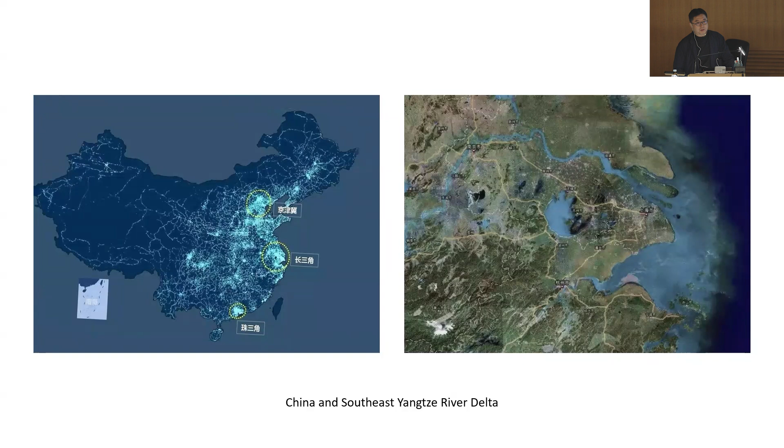And then when I came back, of course, I was born in Shanghai and I grew up in Nanjing. And then some of my relatives are from Hangzhou. So I'm actually really this kind of area. I'm the person of this area. So when I came back, I really want to sort of try to engage with the culture that I'm familiar with.

These are some wisdoms developed from the iterations of Chinese architecture and gardens, including philosophy, ontology, methodology, and experientiality. I see some of my students are laughing because they choose the same picture that I love as well. Yeah, these are from before your class, actually.

But on the other hand, what I faced in reality is quite stunning. I found that there's a big fracture, a big void between what I see from my original culture and the reality in urban or rural, or tectonic or spatial conditions. All these things drive me to start thinking, I cannot just practice like doing some good buildings within this context. I need to think about how to improve, to give a pursuit from my own point of view to engage and push architecture in certain directions.

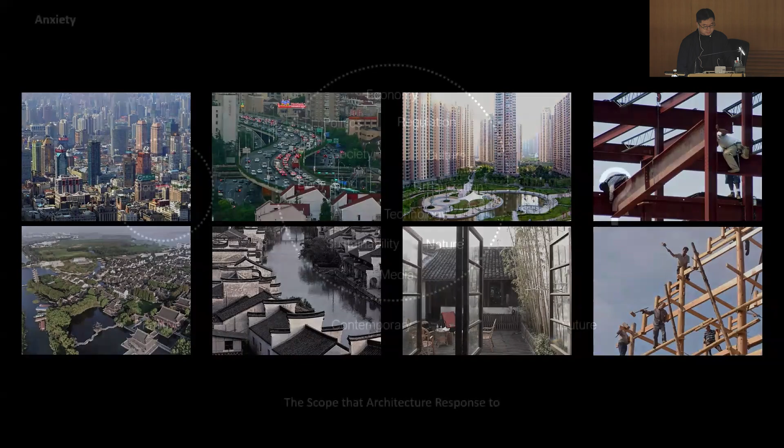I want to make my iteration more significant, more meaningful in a way. So then I think it's not only the problem of the contrast between tradition and modern. It's more of a discourse between the complexity of contemporary compared to our primitive age. And it's not only in China, this question is regarding a global context.

From this diagram, you can see in primitive age, architecture only needed to deal with very few things, like nature, including materials we are using, and our own body and mind. And then maybe a bit beyond that is the tribe, a kind of collective experience.

But then look at today - contemporary architects have to deal with all these different complexities. As practicing architects, some of you sitting here understand that we spend so much time dealing with all these headaches, which leads me to ask the question: can we go beyond it? And all these red marks are actually, I found, artificial things - things extended from human beings.

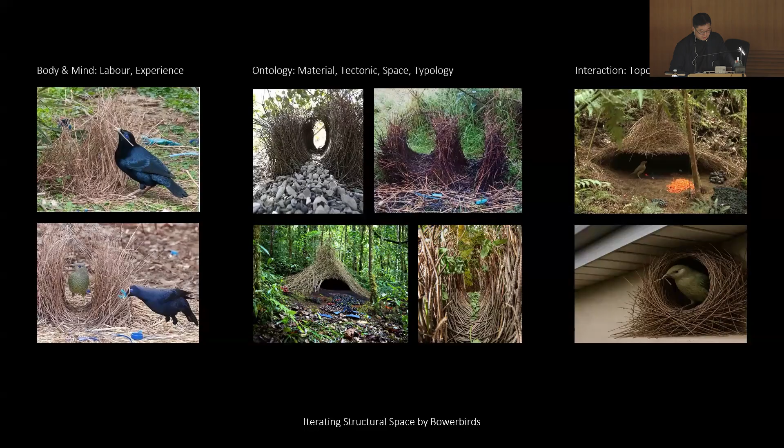So here comes my PhD concept, which is I see architecture as a human's extension, and there are three fundamental paths of architecture or architectural evolution: body, mind, ontology, and interaction. The body-mind is the foundation, ontological value is the intrinsic core, and interaction is the external force, which includes everything—technology, society, nature.

By doing this I clarified my mind. I say whenever technology develops, I won't get anxious anymore because it's just one part of the interaction that architecture has to use to push itself to change and move on. This is only an age where technology is dominating, but that doesn't mean it has to dominate everything all the way through the whole history.

This is how architecture gets evolved. So with this concept, I've developed my idea of how to iterate my practice. Instead of just doing projects every day, every year, I try to make my practice a clear thread to iterate, to seed, instead of just leaving messages.

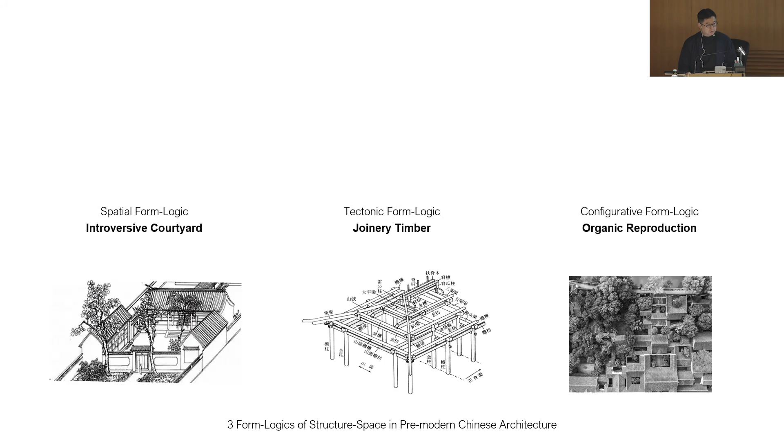These are the three form logics of structural space in pre-modern Chinese architecture: the introversive courtyard, joinery timber, and organic reproduction.

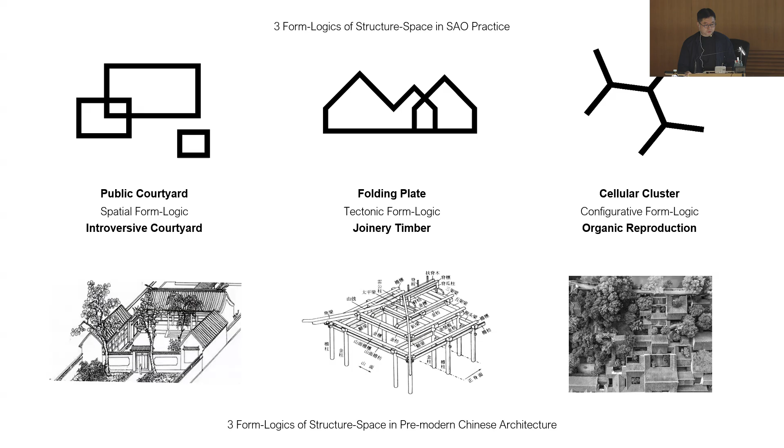What we try to develop are three new directions of iteration: public courtyard, folding plates, and cellular cluster, generated from the culture I grew up in. I can call these, for now, in the past 20 years, the three form logics of structural space in our architecture practice.

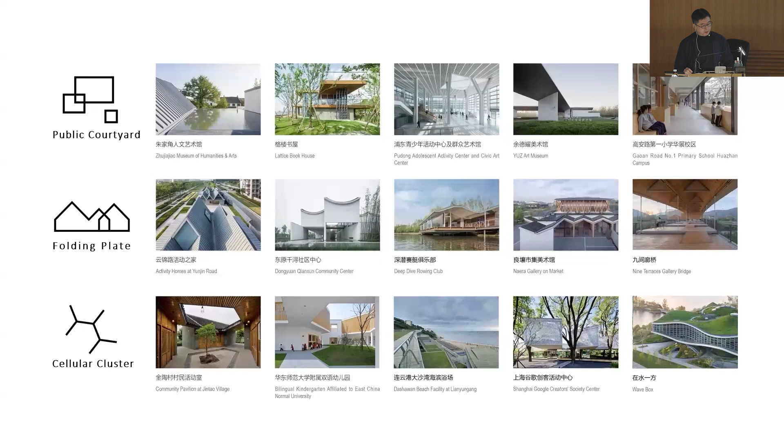These are a grid of our practice with these logics: public courtyard, folding plates, and cellular cluster. Public courtyard deals with spatial category, folding plates uses the cultural identity of the pitched roof with structural space underneath—which is our interest—and third is using the cellular cluster to try something new, pointing to new settlements and how reproductive elements can help our society grow.

Today I'll give some examples of these three threads. First, about public courtyards. There's a lot of threads we can develop from the original form logic to contemporary extension. I won't go into too much detail, but with a common space, one side is tied to nature, the other to the urban direction.

And then we developed this platform idea into an 80,000 square meter children's center and public art center, which is actually interactive platforms to encourage different students and tutors to communicate with each other through the platforms and through all these terraces after they enjoy their education or activities within different sized boxes.

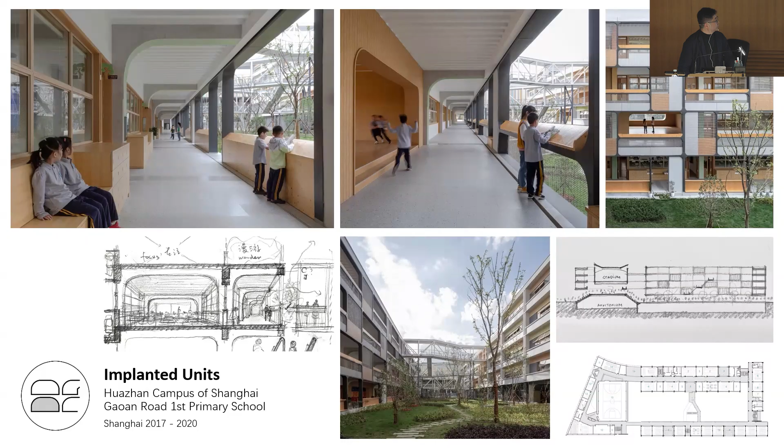And also, we start to implant courtyards into typical, very narrowed down sites for schools. For example, this is something we did in Shanghai, implanting courtyards into the corridor space, giving people the same scale of classroom size for students to engage with nature and also to communicate with each other while reading.

And then also this is a new project we did in Shenzhen, just finished several months ago. We are trying to engage the courtyard, how to open the courtyard and connect different courtyards together with the sports and the educational scenery.

This is the first detailed project I want to develop and elaborate a little more, which is an art museum in Shanghai. I give it a name called Reciprocal Common. The project is actually at the periphery of a developed ancient town, but newly developed, with a green belt around it, and our building is actually...

Can I give this? So there's no pointer, right? Oh, there's a pointer here. Okay, the top one, okay.

This is the location of the museum. We're not doing anything within the town, but it's in the green belt. So we try to keep a distance, keep the building with a distance from the commercial fabric. Whereas this whole town was famous for rice field and rice market, so we are giving agricultural field as part of the outdoor space of the museum.

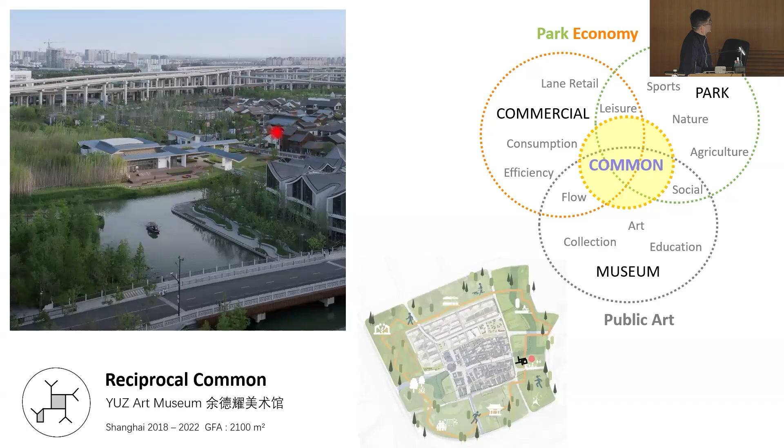So the whole museum is not an enclosed volume that only speaks its own, but also we use the courtyard idea with corridors to expand the experience of the courtyard and link them with the surroundings, with this reciprocal structure. So the museum only occupies one corner. The other three corners are rice field, plaza, and riverfront, and then we have a reciprocal structure of corridor to link all these things together.

And then we try to open up the art activity and expand it to the common space, even tied with the commercial activity. And the whole idea about the reciprocal structure is to divide the normal gable wall in half, so they can freely support the reversed roofing structure, and the indoor space does the same thing. This is the plan and the section.

So you will feel when we do pitched roof, we never do a big scale like, for example, like Wang Shu did, because what he usually does is a grand scale. But we always care about the scale underneath one roof. So this is usually a very intimate size of a traditional house, for example, 6 meters.

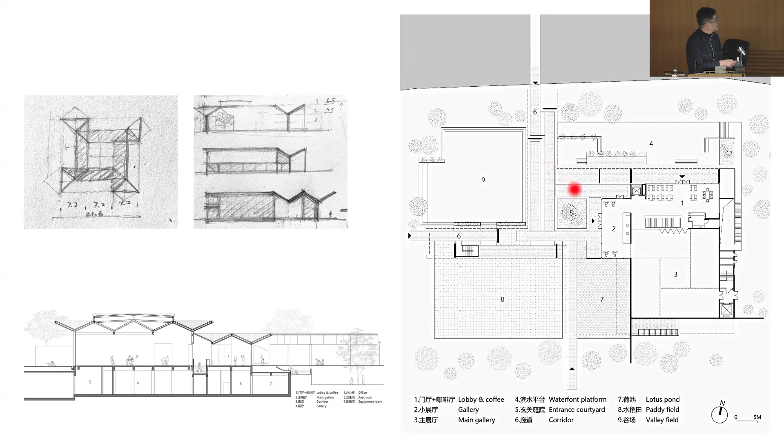So here, this is 7.2 meters for one bay. So altogether, we can have a 20, 21 meter by 21 meter, over 400 square meter gallery space without columns, just a reciprocal beam from four sides. And then we also use the structure to house all the other kind of entry space, cafeteria, small gallery, and the gallery corridor as well.

So here comes the courtyard in the modeling, and this is not a fixed set of species and activity. We hope the structure can serve the community better, with art activities and commercial activities as well. This is also a way that the museum loves a lot, because it can house a lot of activities outside.

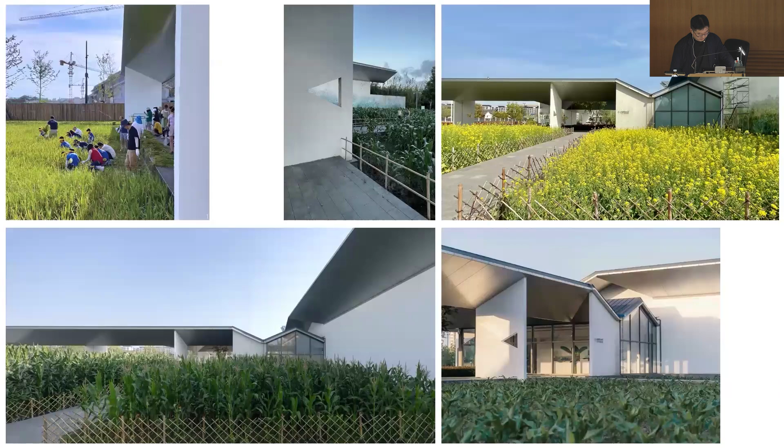And then the courtyard space becomes a test zone area for different species in different seasons, including many species here, including corns and other rice fields, and also you cai - how to say that, the yellow flower thing.

Now, when you enter the museum, you have to go through this vestibule area in the front, and then you enter with all these kind of... So no matter where you are moving, either outdoor or indoor, you are underneath this pitched roof, abstracted, and then pitched, which hopefully can arouse the connection, cultural connection with the tradition.

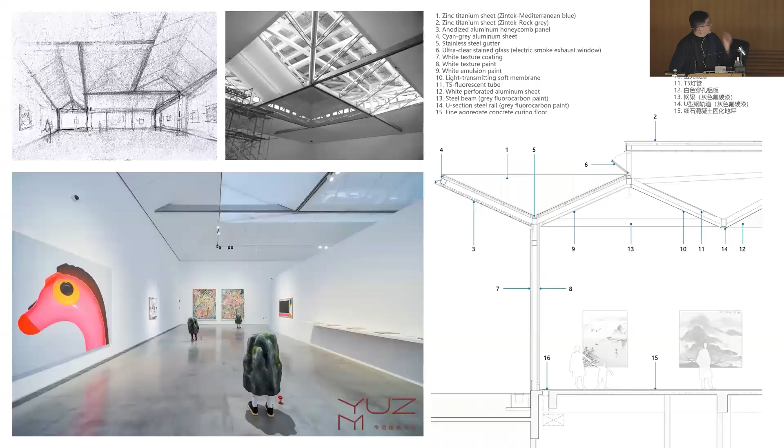And then this is the indoor of the biggest gallery space, which actually uses the courtyard idea in the center to introduce natural light on top of this reciprocal structure. This is the indoor, the first exhibition curated by Wu Hong, a great curator. And then he actually used the sidewall, which corresponds to my reciprocal structure.

These are some collections from the Yuz Museum. Later on, we invited the museum and different curators, and they started to play with the geometry, which for me is kind of interesting.

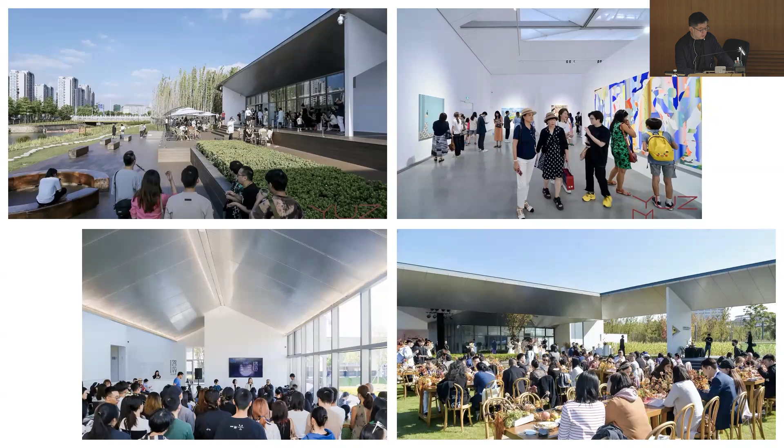They sometimes rotate it and create different feelings and experiences inside. These are some very vivid activity scenarios in and out, like the riverfront, the courtyard, a lunch setting, a lecture setting, and also the opening setting.

This is the second courtyard project, the Dongyuan Qianxun Community Center in Suzhou, another important city in Jiangnan culture. It's in the north of Huqiu Lake.

It's actually part of a big real estate development, and these are all very rigid townhouses. We are doing this community center not only to serve these houses, but also to serve the other surrounding communities. This location shares a demand because this whole area is a little vacant.

At that moment, it wasn't the ancient, traditional, very dense fabric—here is more of an open area. So we do need some sense of enclosure. On the other hand, I also don't want the building to be too enclosed; it also needs a sense of welcoming for the community to join.

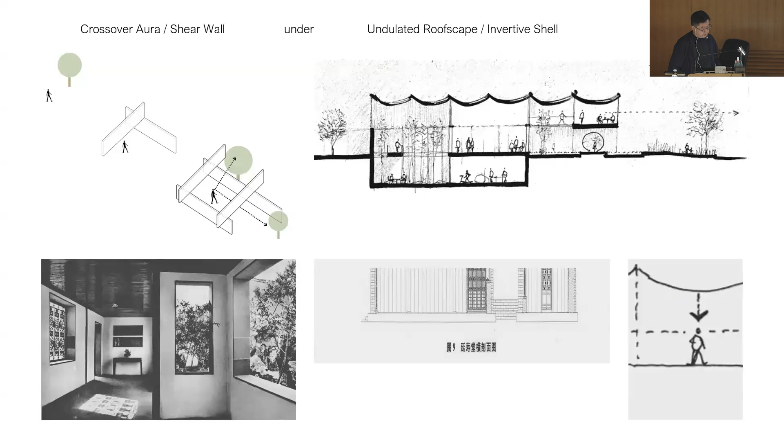With this underlying diagram, you can see how people are actually giving pressure underneath the reversed vault roof. So these are how the structure works, with the indoor and outdoor space.

This whole system is two stories tall. We try to bring the courtyard idea into the second story and merge it together with the ground floor experience, giving a new chance for the traditional courtyard idea to grow in three dimensions.

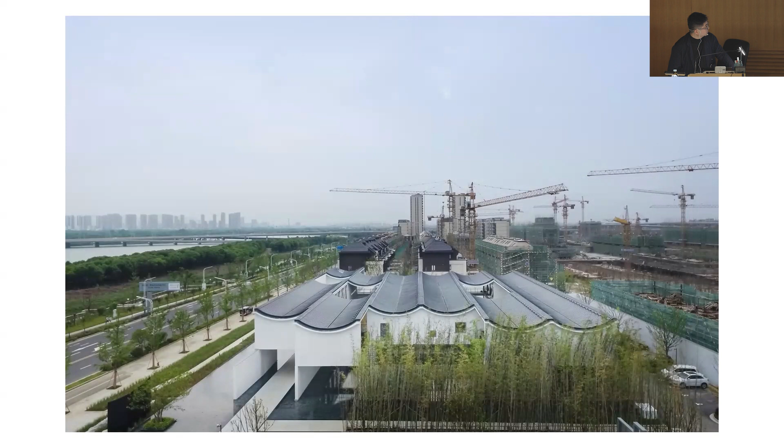You can also see the courtyards inside the building, and how these walls go out and in, containing all these different layers of space inside.

Where there's a sunken garden, it goes even deeper, becoming three stories tall, with bamboo growing from the basement.

The third project is a new project we finished last year, YK Pao School in Shanghai. It's a new building for the school, called the Anna Pao Sohmen Center. Anna Pao Sohmen is the founder of the school, which is now a pretty prestigious international school in Shanghai, and they're opening a new school in Hong Kong.

My client Herbert is here. Yeah, thank you for joining us.

This project is situated near a train subway station, not far from Hongqiao Airport, and all the surroundings are kind of low rise—in Shanghai, a lot of villas, and kind of national resorts around it. But the site itself is pretty tight.

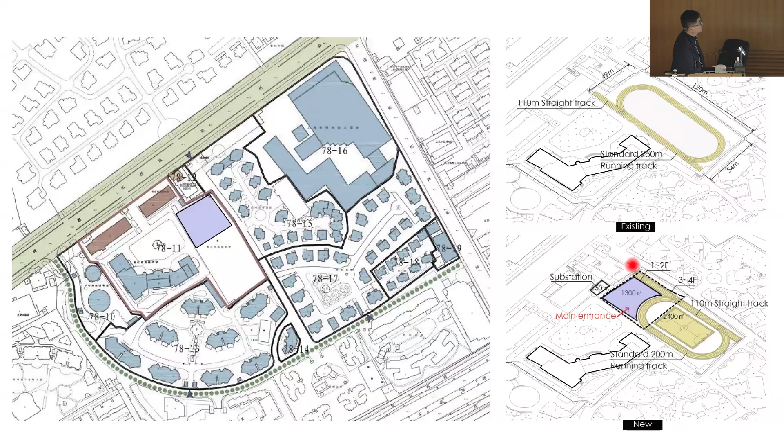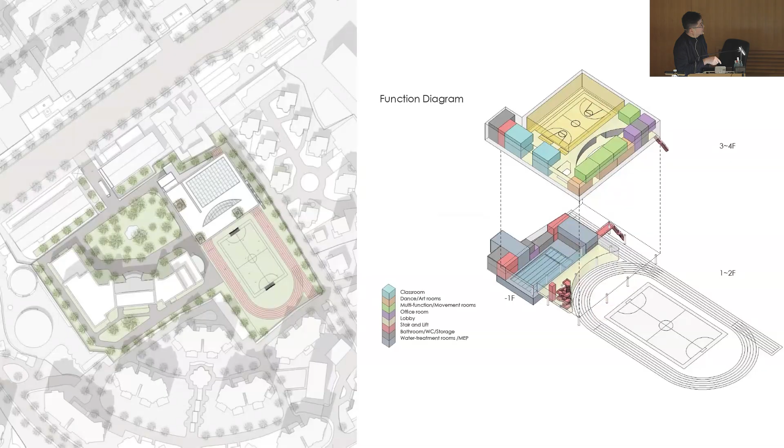This project actually starts from a very rigid limitation. We have to do everything precise, otherwise we cannot afford to have all these things together. So on the ground floor, or bottom, we have a swimming pool, and above that we have to extend out, meaning the front part of the building needs to be cantilevered out or supported from the field.

This is the ground floor. You can see how we introduce the runway into the building, underneath it, with the entry, a lobby, and a swimming pool behind. We use two truss structures, two V-shape columns to support the truss above, so as to open the two corners of the building to allow the track to run through. You can see how deep this building needs to set back on the ground floor.

From this we start to develop the idea of interface. You can see four layers of interface, and we create transparency between the faces so that people don't feel trapped in one space, but instead are welcome to see through and join the other activities around.

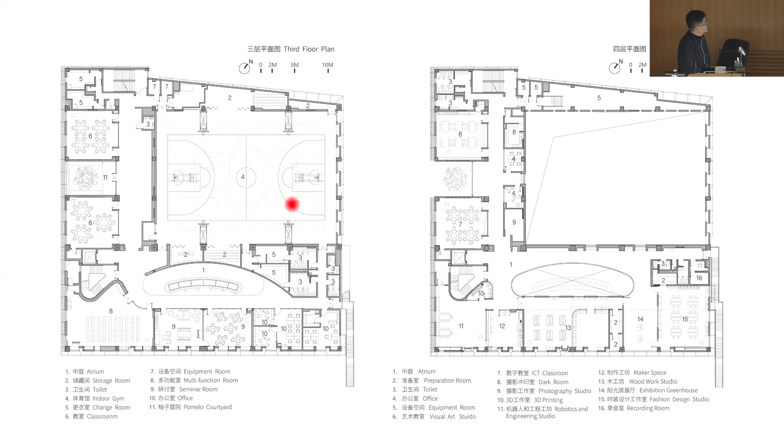This happens on the third and fourth floor, where the stadium sits two stories tall, and the other classrooms surround it with openings and small courtyard spaces, all visible through two axes with transparency, visually and experientially.

This is a section showing how we deal with the interfaces, and also the vertical transparency. There's also another basketball field on top of the stadium.

So we do these terraces, and then tilt the slab up to allow natural light to come in without using electricity in the daytime. The stadium can run on its own.

These are the sections of the building. It's a very complex building with only a little less than 8,000 square meters, but houses really complicated programs within. In Shanghai there's a saying, 螺丝壳里做道场ー I don't know how to translate it exactly, but it means doing a lot of things within very limited space.

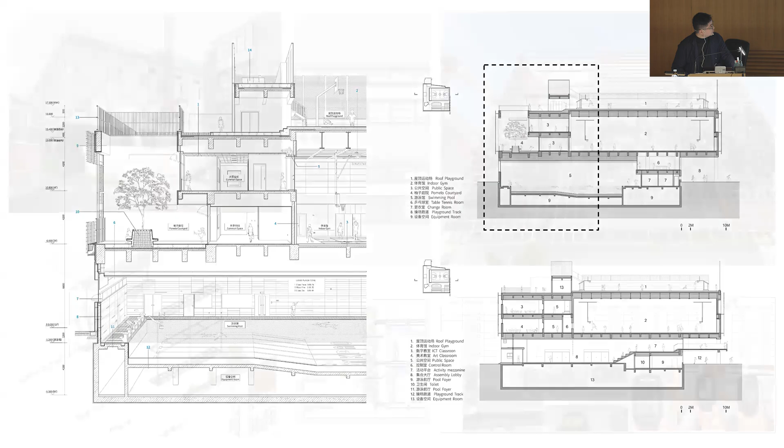Thanks to our client for supporting everything, particularly the mock-up. The building was wrapped by a trellis, a grid around the building, and also with greenery. I hope this greenery can grow, so the whole elevation changes every year, gradually, starting to grow from the second floor. So we need to provide planters.

There was also a big debate on what kind of material needed to be used here. First we were trying a composite bamboo structure, but the contractor complained it would be easily damaged and not climatically friendly.

The client helped us, we talked deeply, and decided to do a mock-up on site at one-to-one scale, comparing bamboo and aluminum together. We did scientific records of the temperatures on top of the surface during the hottest time in summer.

Interestingly, we found there's no significant difference. The temperature on the surface of the aluminum was actually even a little lower than on the bamboo. After one year—thanks also to the pandemic, which delayed the whole project—this test went on for a full year.

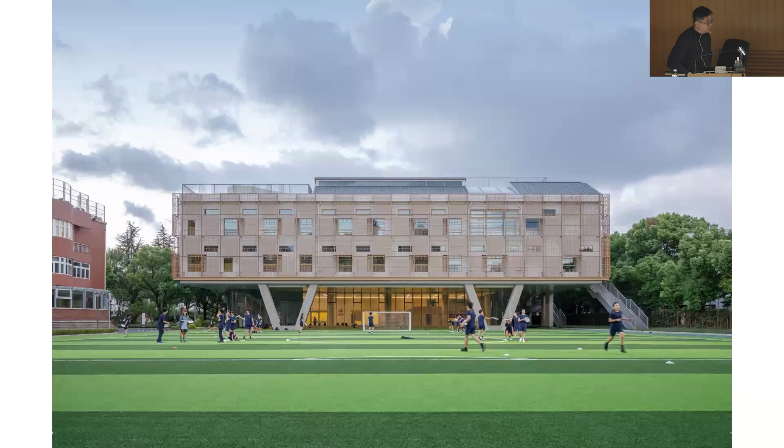And then this is where it's finished. The front. So you can see these V-shaped concrete columns perfectly shape the door of the gate of the soccer fields in the middle. And then we also have netting between the two columns to keep the ball away from the glass. This is the west wall.

And then this opening, behind it's the swimming pool. This is the corner. So with this opening, this truss on top not only allows the track to run through, but also opens a corner between the old building and the new building.

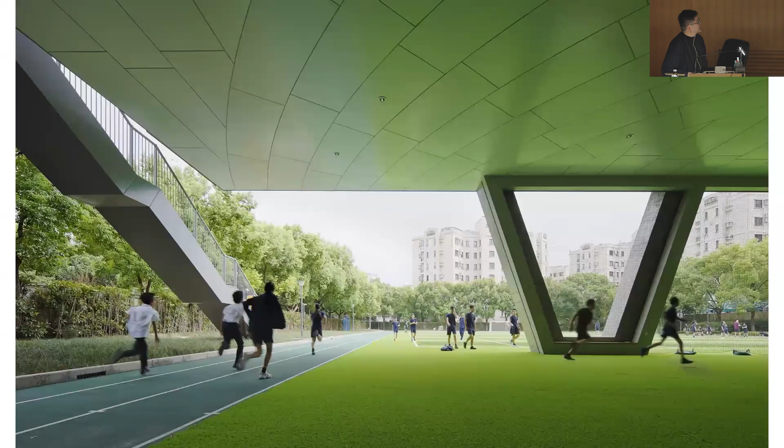And this is the covered area, which reflects the color of the grass. Actually fake grass, this is not real grass. But I like the green sort of bonding into the depths of the space. And this is how the 100-meter long track runs underneath the building.

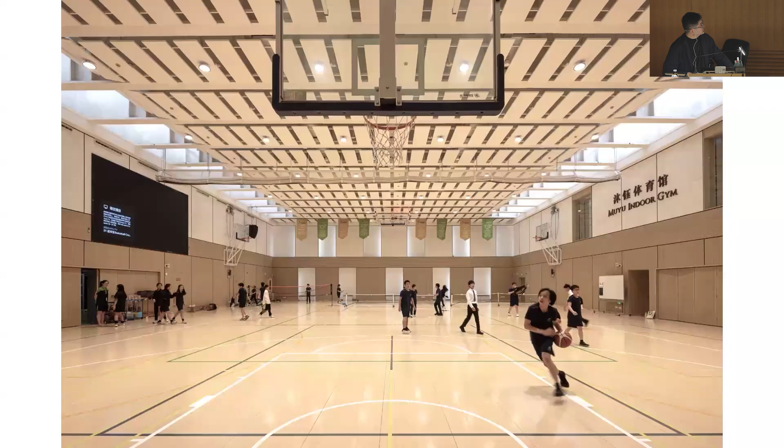The staircase and then the lobby inside on the third floor. And this curve is exactly going down. You can see through, you can see the running track underneath, and this can get some sunlight from the top, which is also a curve. So this curve actually totally reflects the running track underneath the stadium. And all these lights on two sides are also natural lights.

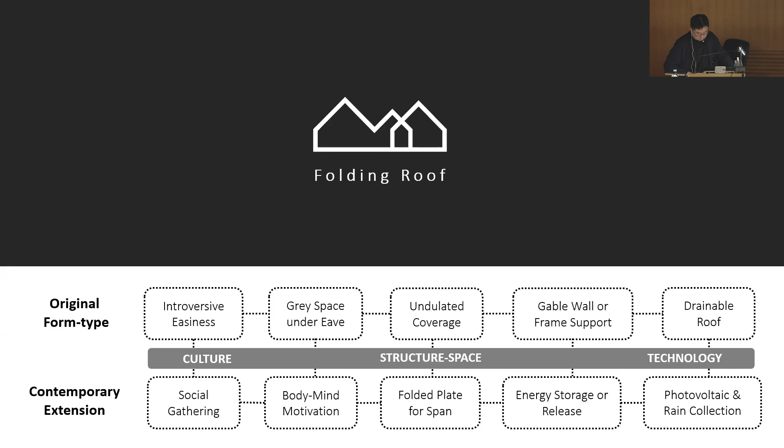First project I want to share is a rowing club in Century Park in Shanghai. Rowing actually was developed in the United Kingdom, but this park is in Shanghai, a grand central park in Shanghai, one of the biggest, and it's riverside. So we tried to combine these two images together: one is a very traditional prototype called 水榭, a building type that is beside the river or even planted into the water, combined with the rowing sports.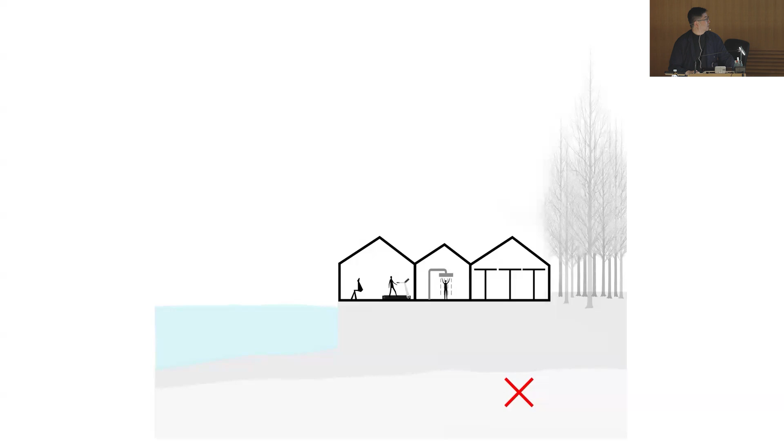So what we are trying to do is embed the activity room into the river, and then leave as much as possible of the forest, and make a dispersed boathouse, so each boathouse will be very thin, slicing into the forest.

And this is the plan that you can see on the right side. So there are three boathouses slicing into the forest, and this is where the river bank was, so we used that for lockers and showers. And then this is the activity room, including exercise and rowing machines, and then they can go down to the deck to practice in the river.

So here you can see my sketch using the symbology of the boat, the rowing activity, as a symbol of how the structural space is developed. Because we have two hands and two oars, the structure is also like two columns. Between the columns is only 1.2 meters, which is the width of the door, and this is the only structure that supports the upper eave and also the bottom deck. So there's no column here and here, and these folded plates start to play with the landscape in either direction.

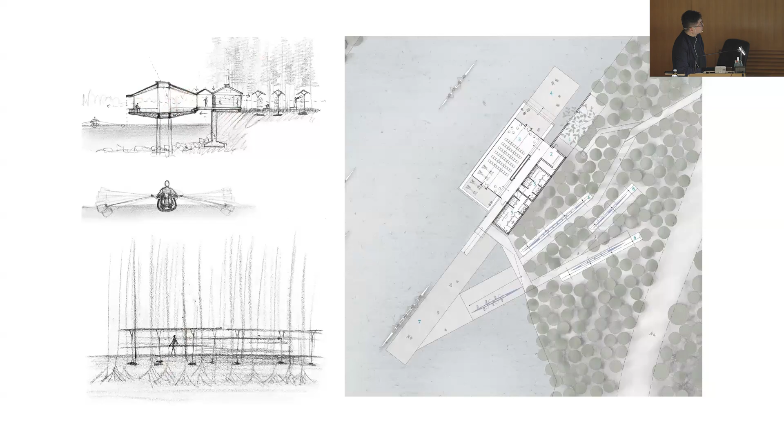And this is the section model. So I hope my students understand what I'm expecting from you for the final review. Structural space is engineering plus atmosphere or cultural identity. So they are not separated, they are together.

And this was the model of the building. Here you can see the main building, two pairs of H-shaped columns to support these two roofs and the deck, and the pipes are embedded in the river bank. Here you can also see another detail about how I use two L-shaped corner column angles to form this small column and bifurcate them on top to support the pitched roof for the boathouse. This is actually the thinnest building we have ever done, it's only 1.6 meters wide.

And then at the bottom, the trellis is supported by individual concrete foundations to allow earth, frogs, and all these species to go underneath, in and out, without disturbing their life.

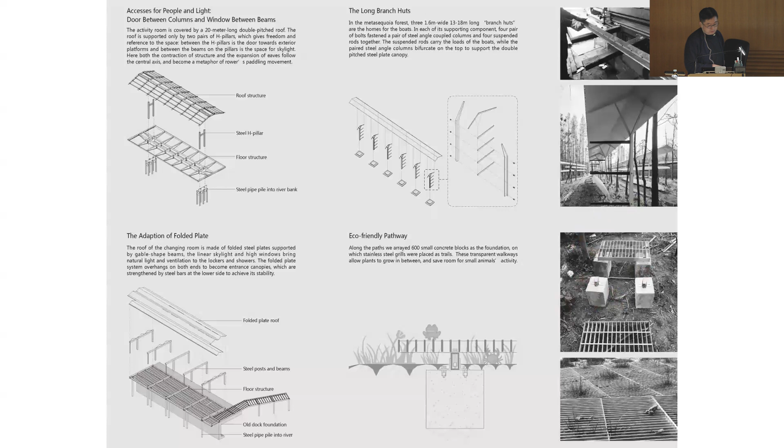So this is how the building is situated in the landscape, and this is how the decks separate them into two paths in the front. And this is how the boathouse is inserted, assembled from the factory.

The gate. We actually use the wall extending out to separate the experience inside, in the forest, and then in the river. We want to have them really separated, not really giving transparency. We want to give a surprising experience for the users.

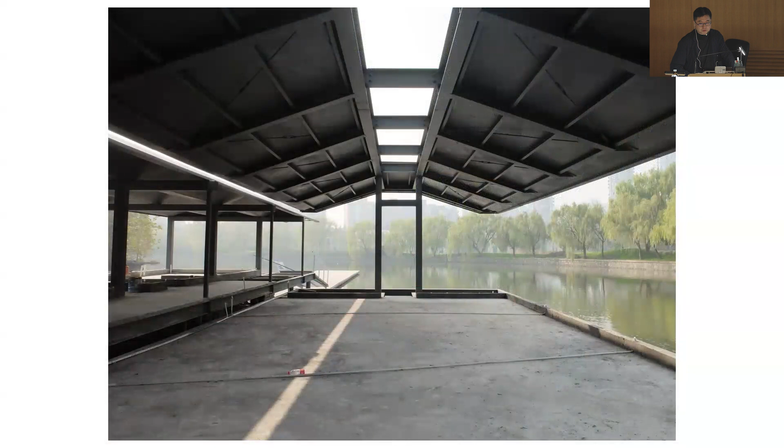And this is the structural space under construction - it's always better than when it's finished. Until now I've never figured out a way to save this feeling, so I'm still trying to find out, because only by seeing this can you clearly see how the structure is supported, without misunderstanding the logic of the structure.

And this is when it's finished. The air conditioning goes with this machine, and then with the ducts connecting to the bank. So the whole facade can be opened by these folded windows. And this is the deck behind.

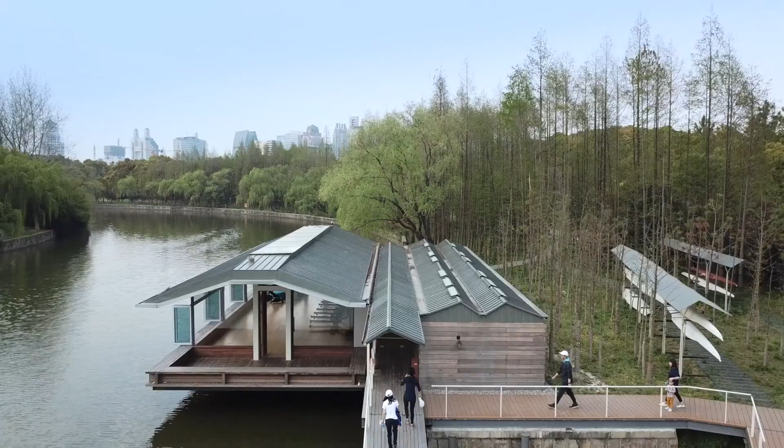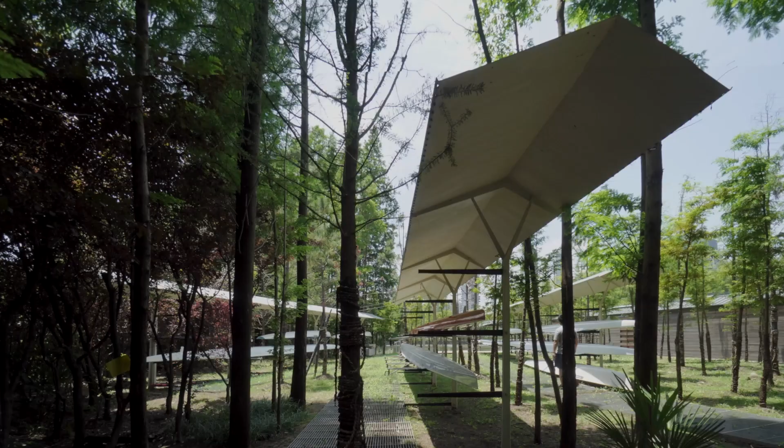Okay, there's also a small video to save time.

This is the second project, the folding roof activity homes at Yunjin Road West Bund. People who went to Shanghai recently may know West Bund is one of the hottest spots in Shanghai, with many arts and architecture, and also a new industry of media, with Alibaba and other companies based there.

The hottest spots are maybe along the Huangpu River bank, but the project we did is actually a little bit inland, at what was actually one of the earliest airports in Asia, called Longhua Airport. This was the runway of the airport, back in 2010 before it was renovated. After that, it was renovated into a big boulevard together with a green park, a runway - called Runway Park. So we designed three buildings in the park.

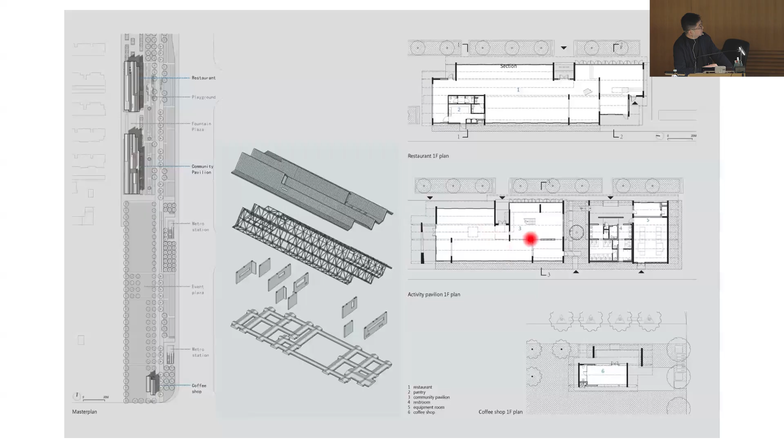Without columns, these folded plates can span like 15 to 19 meters. That can create a different kind of hint of how to use the space. But all these spaces are actually open to each other, so we are welcoming different layouts for the users, and also give them a hint to encourage them to communicate with each other. This is how the community space is working in the future, I think.

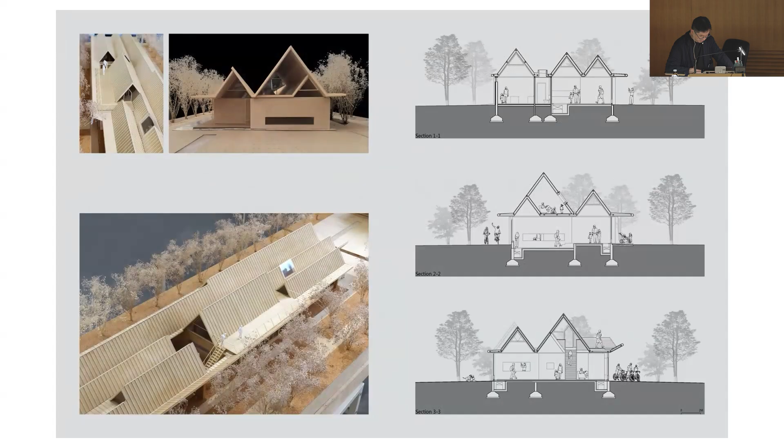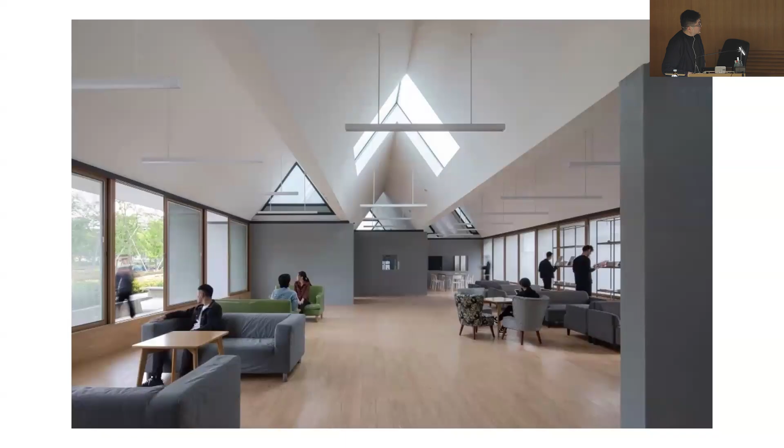We developed this bridge, I call it Nine Terraces Bridge. We used the pitched roof as a span carrier in the Nanjing Horticulture Expo. We designed this hotel village, the north part of it. Actually, the southern part is done by Dong Gong, who gave a lecture two weeks ago, but it seems he didn't publish this building. Maybe not precise enough for him.

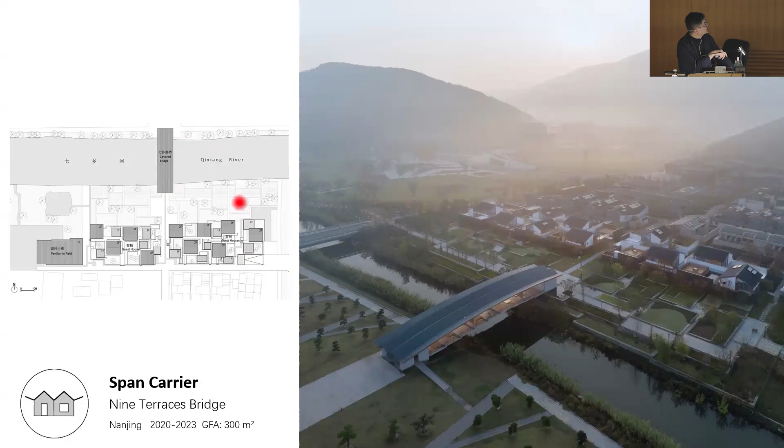We did the pavilion and some courtyard houses, and then this bridge going north to the parking space. There's a requirement for river clearance for the boats, and on one side of the river is the parking lot, and visitors need to go across the bridge to their hotels. We thought they drive for so long, we don't want them to climb too high across the river, so we wanted to keep the thickness of the bridge platform as small as possible.

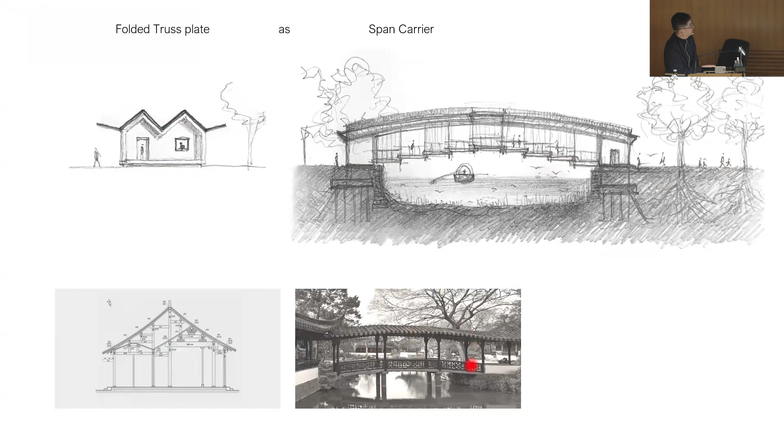Of course we don't like the idea of doing a big beam, because when you do a beam it has height, and we also don't want to do a truss because the truss is maybe too industrial to us. So we wanted to give the two bridge heads a sense of going home, like a pitched roof going home, so we cut it into half, like two half-houses. Here are some references from the Suzhou Gardens with this kind of lightness of bridge on top of the river.

So the final idea is to hide the truss, folding plate truss, inside the roof system, and use this as the main structure, hanging these platforms with three rods. People need to go up and down the bridge because there's only a 200 to 300 millimeter difference, so we can have slopes and small steps to link all the platforms together.

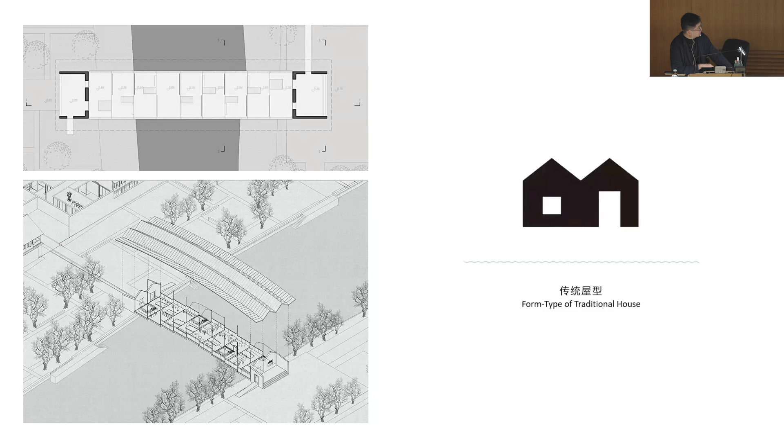By doing this, we can give a kind of social community usage to the bridge, meaning it can be divided into 9 different spaces. People can use them for maybe secondhand markets, whatever activities, retail, or resting areas underneath on the platform. This is a small animation about how the structure space works.

Oh, I hate the music. Sorry. My system.

This is the best picture I like, which shows the lightness of the platform that is hung from the roof. So by doing this, I convince myself it's not always a problem of traditional versus contemporary. We should go beyond that. But it's true that the form from the previous age actually ties us back with a cultural identity that I believe is already embedded in our blood, no matter which country or area you are from. So it is actually very meaningful to explore new possibilities of this form itself, to see how it can serve our future.

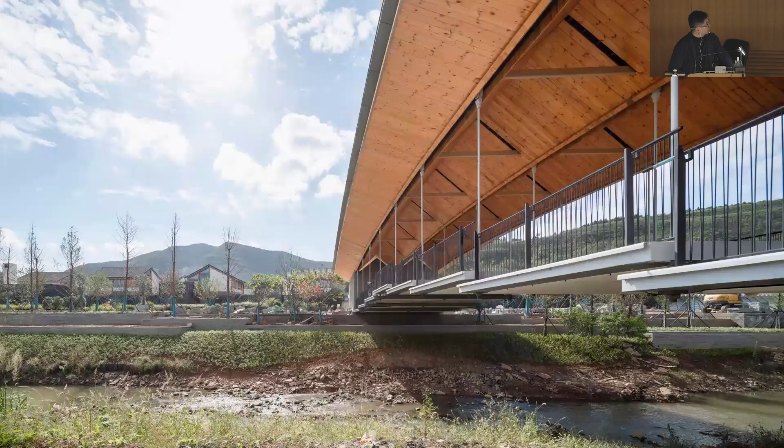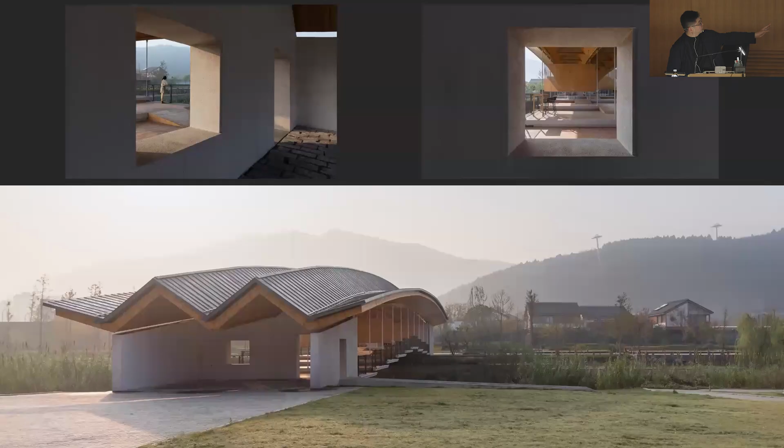This is how the bridge spans to the other side of the river. Each bridgehead is kept very intimate, like a small house with just one door plus one window opening. On the bridge, the terraces are divided, roughly defined by a bamboo screen, and people can sit on both sides to look outside.

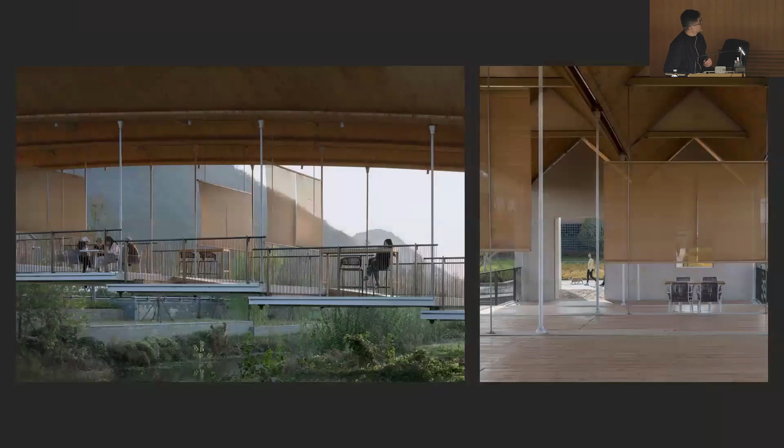Last category, I only have 2 projects. I call it Cellular Cluster, which is generated from biological form logic, and I think there could be a lot of architecture extension through that in terms of unit capability and organic reproduction.

We developed it from this single collector as one piece of units, and then to a cluster of units as a kindergarten.

And then to this Dashawan Beach facility, we utilize the periphery of the hexagon shape to make a Y-shape structure that spans different levels.

So here comes another experiment of the Y shape derived from the hexagon geometry, which is the Google Developers Group Center in Shanghai. On the side, there are 6 camphor trees left over, and our building is just underneath it.

The idea is that because this whole green belt is very noisy, with pedestrians walking through to work every day, if we want to have some kind of activity space, we'd better lift it up. So we came up with a cantilever idea, and lifted the whole volume up.

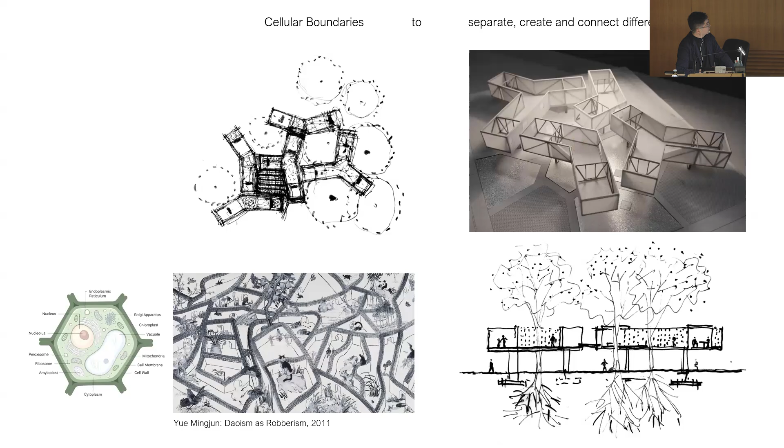So all the pieces are only 4.5 meters wide, and they organize these spaces or gardens in the sky.

We even created interesting pedestrian roads—everything has to go through the middle. When we have a toilet or restroom, it has to be divided into 4 small rooms.

This is how the structure is assembled on site. Each tank is produced in the factory and assembled together on site.

In order to prevent damage to the roots of the tree, since we're playing with the tree, we lifted up the foundation to make it flat and bigger, avoiding the need for it to go deeper. But simultaneously, this would block the rain and nutrition of the water reaching the roots. So in the end, we made the foundation translucent, adding a lot of pipes to allow water and rain to go down.

One of my colleagues, who graduated from Hong Kong U, told me he had another opinion after talking with a landscape professor here—that there could be another solution where this goes smaller but deeper, to protect the roots in a better way. But anyway, this was our solution at the time.

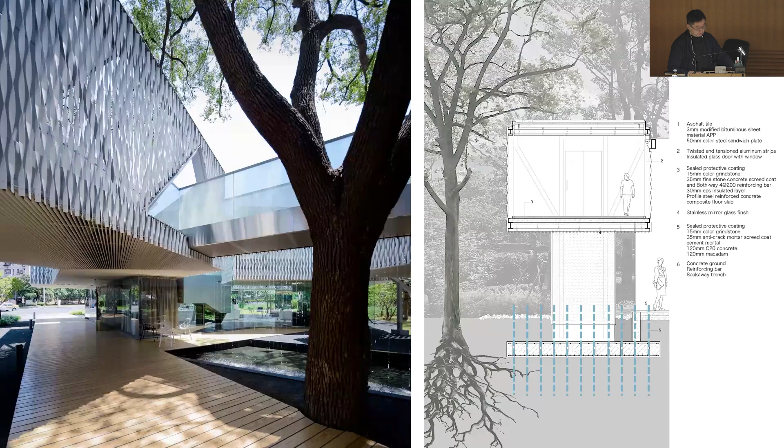All the floors are kept pretty low. Every floor is only 0.9 meters to avoid intervention with the tree trunks.

You can see this combination of structure actually finally disappears, reflected through these reflective stainless steel surfaces. But on top, you can see the truss structure behind the aluminum panel, twisted and tensioned, to give it a symbol—something we can learn from the tree itself.

And then this facade is permeable by wind, rain, and light. It's open on the ground floor, and quiet on the second floor with reflecting pools. All the openings, just like a Suzhou Garden, have to follow the logic of the structure of the truss, so they have to be triangular.

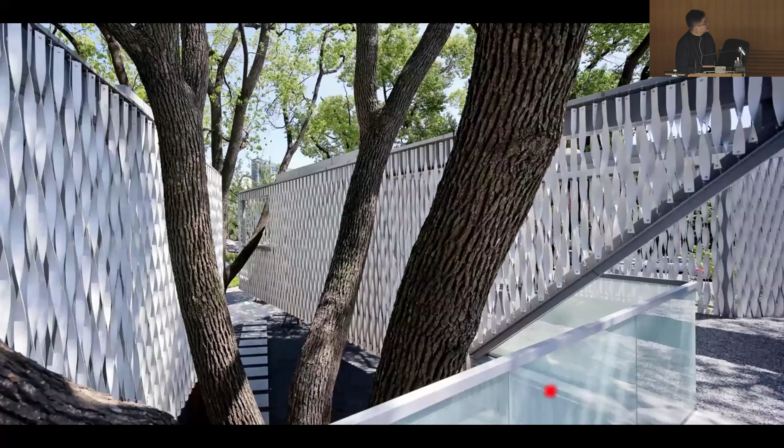We allow the trees to go through the building into it, so they sort of fight or live together with the structure.

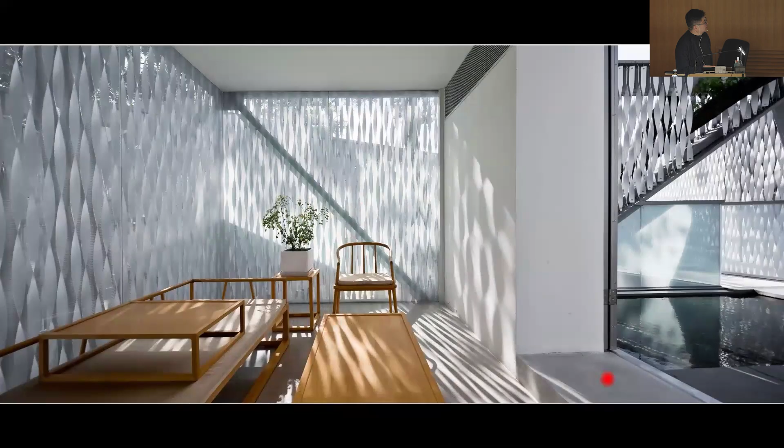This is the indoor space. In order to utilize the height, we even use steps—so in every room, you need to step down one step into the room.

Okay, the last project is a landmark, I would say. Very different from other projects we did before, but I still keep it within my kind of cell idea, cell cluster idea.

This is a project called Wave Cube, and it's run by a company doing experiential activity here in the building for Three Body Problem. I don't know if you know this science fiction novel, but globally it's pretty famous.

It's in Fengxian in China, in the Shanghai area, besides this artificial lake, and they want to do a kind of landmark around the lake. The biggest architect they invited was Sou Fujimoto, who did a museum here, but for some reason they were not quite satisfied, so six years ago they asked us to do a competition.

We got the project to do what they called in the beginning a science museum on the site. So the Three Body Problem concept hadn't jumped in yet.

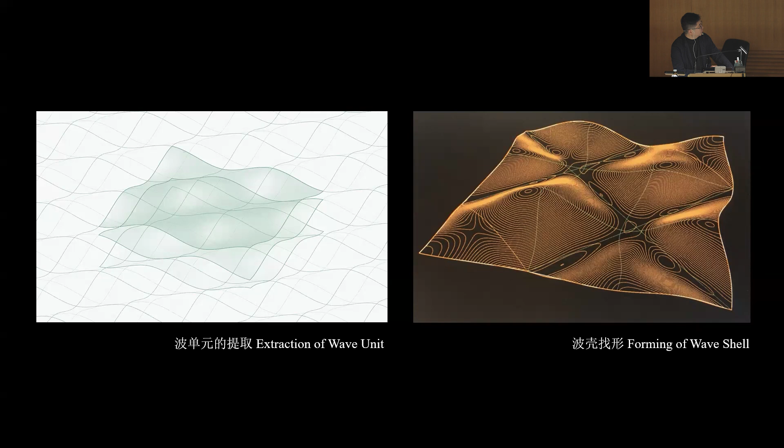But we have our own power. These are the extraction of the wave units from four layers of wave, and then the forming of how we form the wave shell.

The whole structure can be divided into, think of them like three waves. One is these hills on the ground, and they support the bottom, the lower layer of shell, and then the upper layer of shell.

And the force of the structure is not direct—it's quite challenging. If you look at this model, you can see from the top, the force goes in two directions into this X-shaped shear wall. Then from these shear walls, the force cannot go straight down; it has to be distributed again into these two directions, and then to the hill. The hill, of course, has a mushroom column underneath, but you can see this indirect force.

The structural engineer Zhang Jun and I discussed a lot about the structure. We found that although it's not optimal in terms of direct force direction, it's good for earthquakes, for seismic resistance, because the shell provides a lot of diagonals.

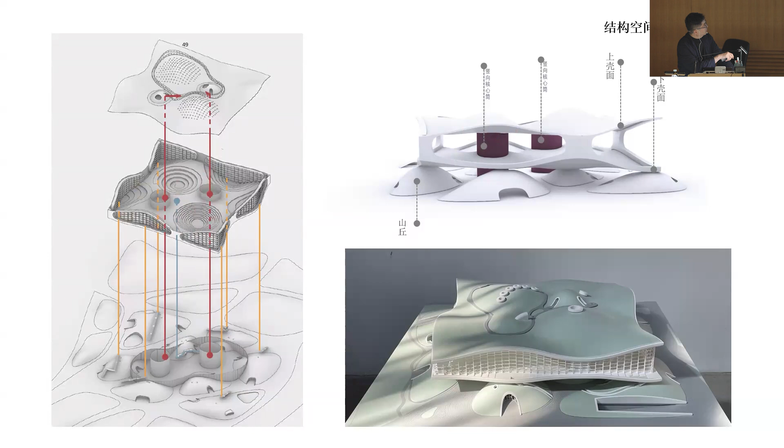So in the interior, we wanted to introduce not a flat floor at all—it's actually undulated up and down with all these different venues. So you can say it's actually very logical in a way.

This is the structure analysis, and Zhang Jun did a fantastic job. We discussed and tried to find a form together. In the end, it's something between an arch and folded plates.

So here you can see the diagram. The red one is compression, and the blue one is tension. For the tension, we had to do a lot of pre-stressed steel bars in the tubes—pre-stressed tendon ducts in the slab.

This diagram shows the cantilever. The whole size of the square is 80 meters by 80 meters, so the cantilever is 27 meters—also a pretty big cantilever.

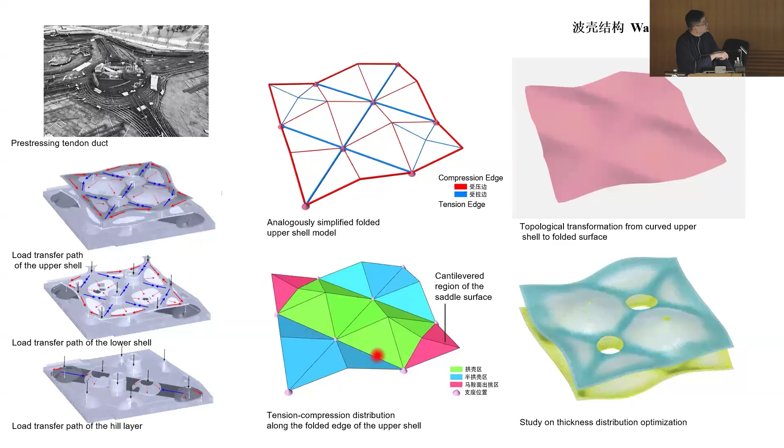For construction, we also developed this idea together with the contractor. In the beginning we wanted to do a 3D printed formwork—using something like a 1.5 meter square to support a customized 3D printed formwork—but that was rejected by the contractor because it was too costly. They wanted to go with an ordinary, conventional way of doing wood formwork, but then how do you control the precision? We were unhappy about this.

Well, they didn't want to go with our approach, so in order to convince us, they invented this 360-degree rotatable detail to control the tube, because this is a composite wood formwork supported by tube grids.

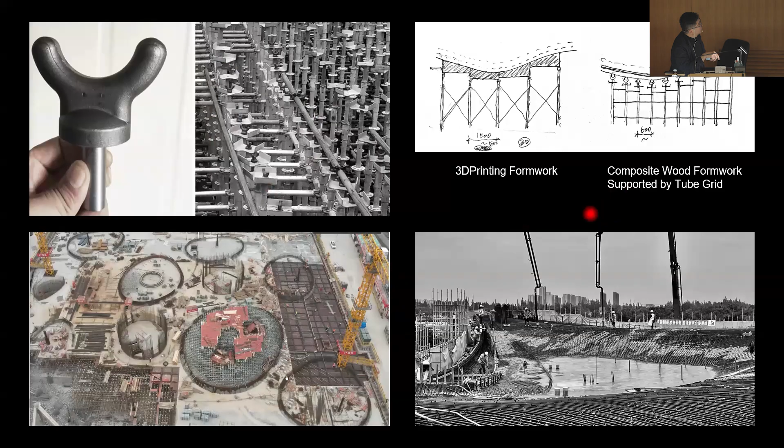This is the construction process.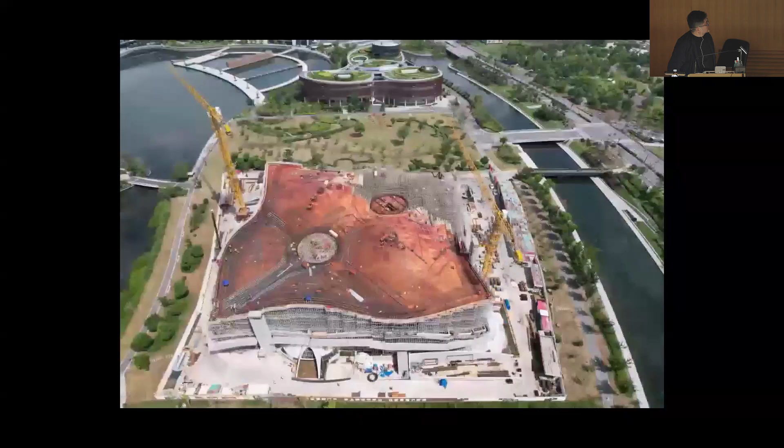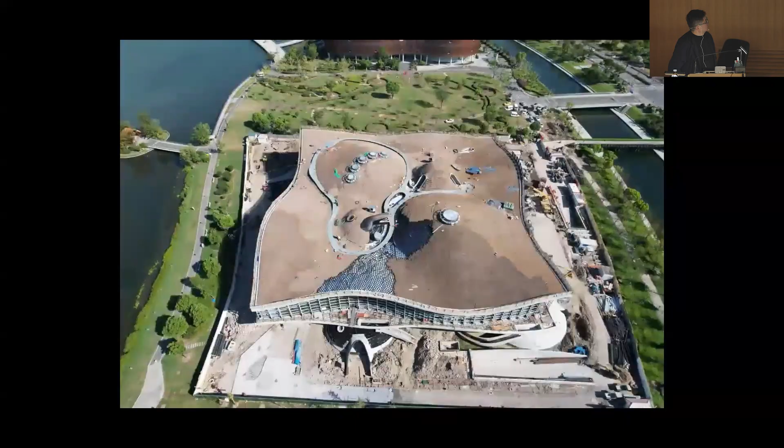There's a video about the construction and the structural space.

Music by David Darling, my favorite cellist and composer.

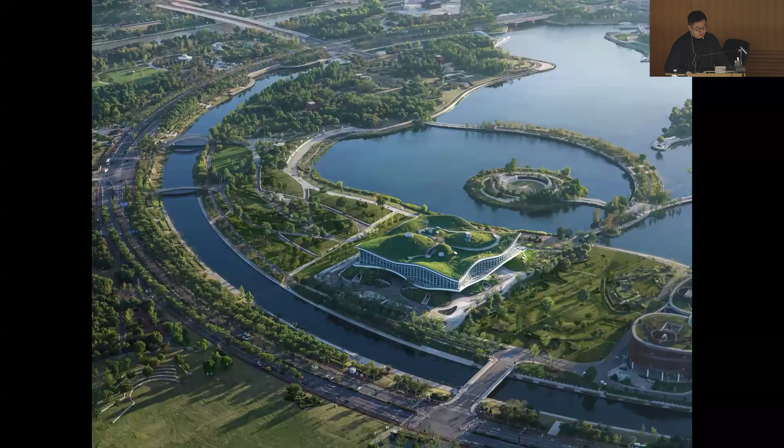In order to save time, I'll skip these pictures and go to another video, which is after it's finished.

This is the roof. Underneath the shell.

Maybe just a few words about the science fiction. These are the three best science fiction works I love: from Isaac Asimov, Arthur Clarke's legendary 2001: A Space Odyssey, and Liu Cixin's Three-Body Problem.

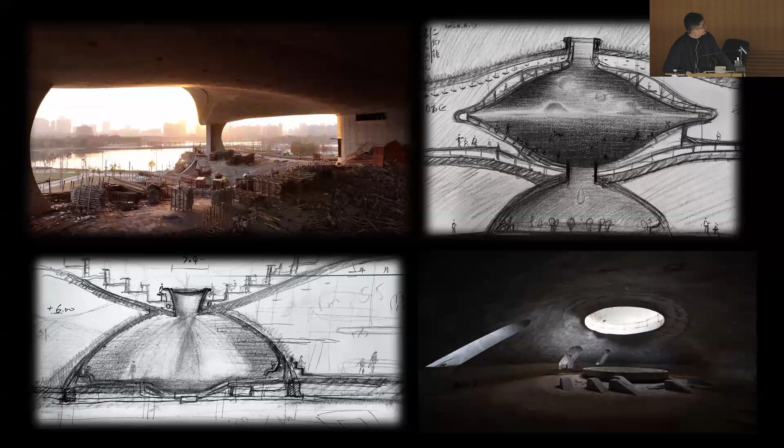These are some sketches I did for the space in the beginning, and then end up with some internal atmosphere and experience inside.

Okay, this is the final video, so it's good to compare the difference.

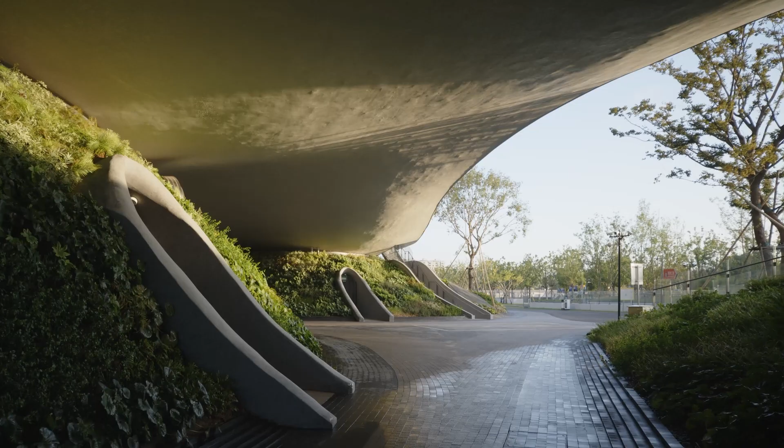It's actually not done very precisely. Even from the video, you can see a lot of mistakes.

These are two quotes from two science fiction novels. Arthur Clarke said in Profiles of the Future: the only way of discovering the limits of the possible is to venture a little way past them into the impossible. The second quote is from Liu Cixin's Three-Body Problem third book, called Death's End: grant civilization to time, not time to civilization.